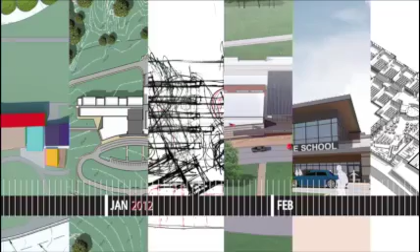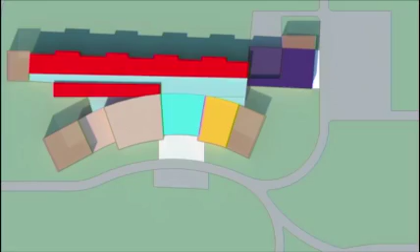It was truly an honor for our firm to be selected to be the architect for the new Broken Arrow Middle School. The key to making a short schedule work is a consistent design process. Our process consists of a good site analysis, then site organization, applying clear concepts to tie everything together, and then working hard on the layout, both to make a building that's economical to build and that would meet all the stakeholders' expectations.

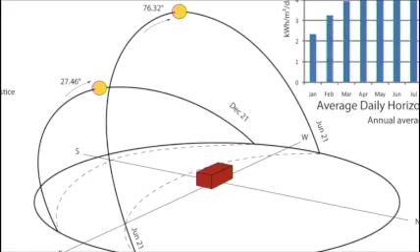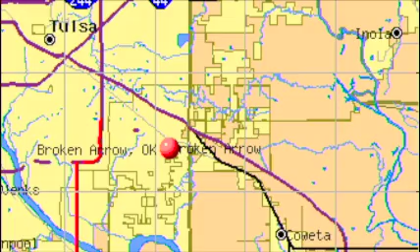Our first step is always a detailed analysis of the site. This includes climate studies such as terrain, sun angles, temperature, moisture, wind speed, and wind direction, as well as neighborhood studies like utilities, traffic patterns, population and enrollment data, adjacent buildings, and even native flora and fauna. The team visited Haskell and Centennial, which helped to align expectations between square footage required and project budget. All this establishes contextual values to ensure the school would develop roots in the region and community.

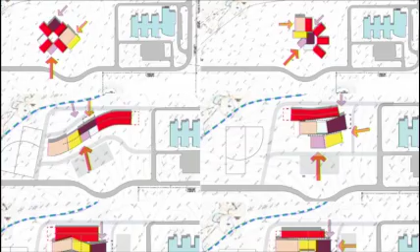Using what we had learned from the site analysis and evolving program, we studied many options and discussed the pros and cons. Our first task was site organization. Topics discussed included site security, building entry locations, bus and parent drop-off, playfield location, service yard, and fire lanes. Three options were then presented to the Broken Arrow Committee that had good solar orientation and climate responsiveness.

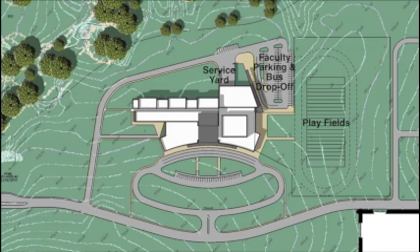The final site layout had the visitor parking and parent drop-off on axis with the main entrance on a one-way loop. Maintenance, faculty, and bus traffic are separated from the main entry to allow for service access from the north and faculty and bus drop-off from the east. Playfields and a future track are located to the east to provide a buffer from the elementary school. This also allows for the faculty parking lot to double as event parking on evenings and weekends for the cafeteria, gym, and fields.

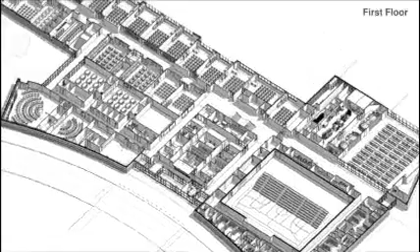From the very beginning, we understood that any middle school should be a building of transition. Transition from neighborhood school to high school. Transition from child to adolescent. Transition from dependent to independent. Elementary school has given them a love for knowledge, and middle school will start to connect them with lifelong learning, inform them of challenges, and help them visualize a world bigger than their neighborhood.

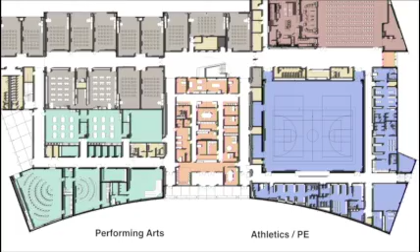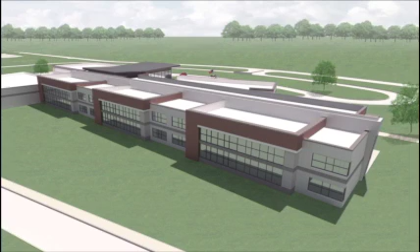The front of this building houses performing arts and athletic spaces that are not only bigger physically, but also encourage community over individuality. The exterior of the front of the building is deliberately designed to look more civic, with the library having a prominent position above the administration, both marking the entrance of the school and proclaiming the district's priority of academics. The backside houses all the classrooms and is designed to have a more intimate scale conducive for individual study.

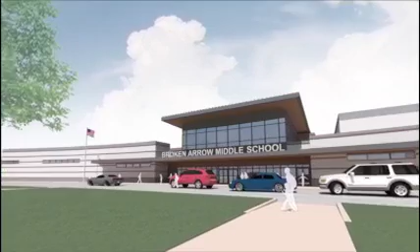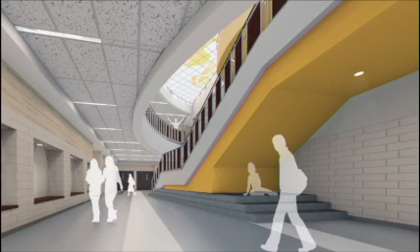In the very center of the campus, you will find the main entrance and the administration, the student commons, and the library. You will enter the administration through a vestibule central to the main entrance in full view of the main receptionist. They will check you in and direct you to the performing arts and classroom side or to the athletics and food service side of the campus. Behind the wall of the receptionist are the principal and other administrators, counselors, and the clinic, all with separate entrances to their spaces. Immediately adjacent to the administration is the student commons, the central circulation hub of the facility.

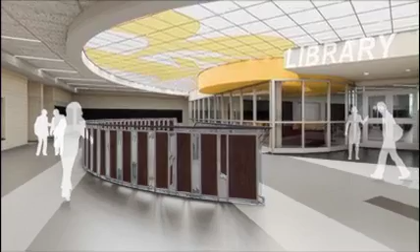Easily monitored by the administration, the commons connects every part of the school. At the top of the grand stair is the library. Designed to be more of a gathering space than just a place for books, it was essential the library connected directly to the commons. The classrooms are laid out in 2 floors and 4 pods, giving the flexibility to the principal for organizing the different grade levels.

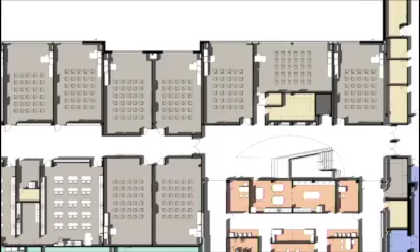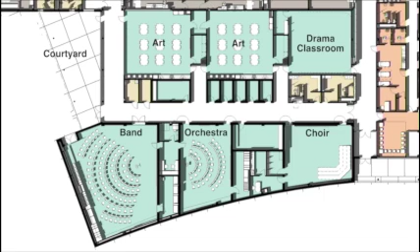The majority of the classrooms have north-facing windows for views of the trees and lots of daylight, with minimal solar heat gain. All classrooms will have all the latest district technology and are aptly sized to be appropriate for this age group. The performing arts area will consist of band, orchestra, and choir, a black box theater for drama, and 2 large art rooms and a secure art courtyard. All these spaces will be located off a single corridor and will have shared restrooms and practice rooms. The art courtyard will also double as a loading area for any of the programs.

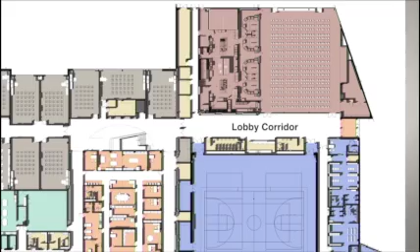The event entry, which is located just off the faculty parking lot, will bring you into a lobby corridor in between the gymnasium and cafeteria. Concessions and restrooms are conveniently located here to serve after-school or weekend functions at either venue, and it can be locked off from the rest of the school during after-hours use.

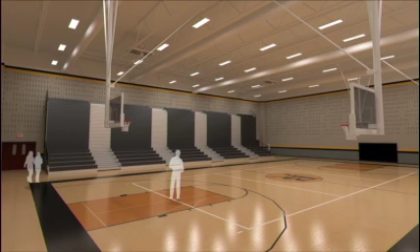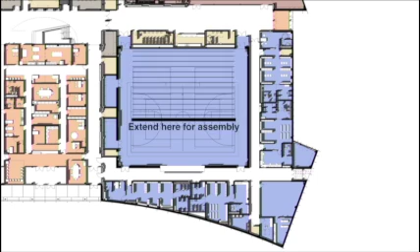The gymnasium was designed for multiple functions. With the bleachers in the closed position, this space is ideal for physical education or practice. Extend the bleachers partially and the space seats 200 to 400 for a basketball or volleyball game. Extend the bleachers fully and you have stadium seating for the entire student population for an assembly or an evening performance. The two back corridors are organized into boys and girls with offices located at the ends. The cafeteria seats 500 and has north windows overlooking an outdoor eating area. There are 4 serving lines with roll-down grills for security when the room is being used by the community.

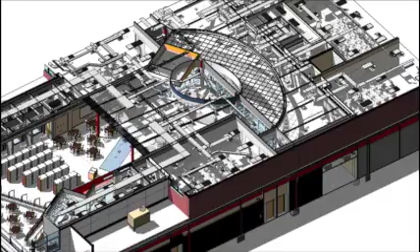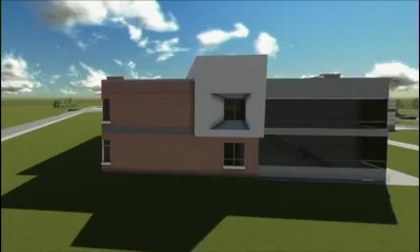What you won't see will be just as important. This building will be one of the most energy efficient of its kind because of high efficiency HVAC units and a superior insulated building envelope. Each classroom is designed with its own mechanical unit and thermostat to increase thermal comfort. What you won't see is that utilizing a 2-story footprint minimizes foundation and roof cost while increasing green area on the site to absorb more stormwater, preventing excess runoff and erosion in neighborhood creeks and drainage channels.

What you won't see is that the paint, adhesives, and building materials are manufactured with low VOCs. Walk-off mats will be at all entrances to help reduce dust and allergens in the building. All that, combined with a sound daylighting strategy and views to the natural environment, have been proven to increase attendance, user health, and test scores.